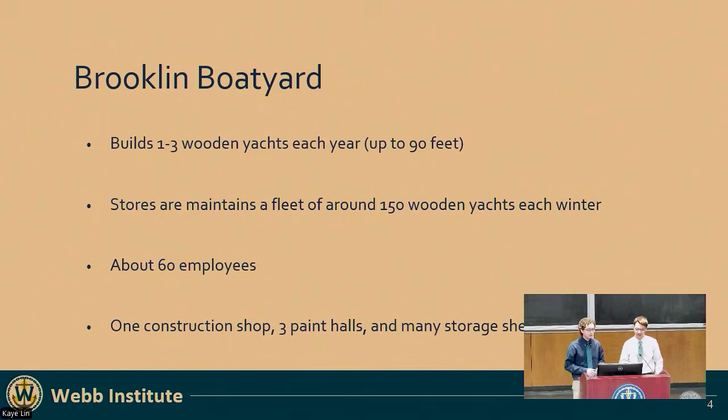Now, a little about Brooklin Boatyard. It's a pretty small wooden boatyard with about 60 employees, and they build about 1 to 3 new-build wooden yachts per year. A large part of their business is repairing and maintaining a fleet of about 150 wooden yachts owned by a variety of different people. A lot of their work is bringing those in and out of the water, storing them, and doing maintenance on them.

Like Curtis mentioned, it's a full-service boatyard. They deal mostly with pleasure craft, motor yachts, sailing yachts. The population of Brooklin triples in the summer, so it's a lot of service for vacation goers. But they do some commercial work. When we were out there, the harbor or bay that they service had one commercial scallop boat out, and when we were there, they took a lobster boat in and out.

It's a full service wood shop. They've got an incredible selection of planers and joiners and table saws, band saws, anything and everything you could want. Full industrial equipment. It was really quite amazing.

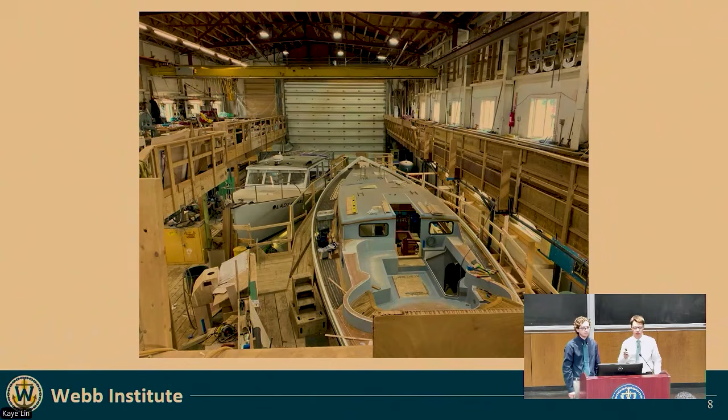It was repurposed, I think in the 60s, when Joel White started the yard. He was actually E.B. White's son, the guy who wrote Charlotte's Web, which is kind of fun. But yeah, it's a full-size shop. In this picture you can see the lobster boat we were working on, from the 40s, a bunch of restoration work being done, and a new 56-foot cruising boat that I believe they launched this past July.

So a few jobs that we did, we kind of got to see the entire life cycle of teak decking. We installed teak deck on one vessel, sanded it down on another, and repaired the caulking on a third one.

We also, to get Lady Claire, the lobster boat, into the main hall, we removed a portion of the 3rd level of the shop, which was interesting. And when we weren't doing other jobs, we did little tasks like sweeping and bringing out trash and stuff.

Another thing we spent a fair amount of time working on was composites. I didn't realize this going into it, but a lot of, especially the new build boats that Brooklin does, they do a lot of work with composites, either wood epoxy composite or carbon or glass composites with foam core, carbon core, honeycomb core, kind of runs the gamut.

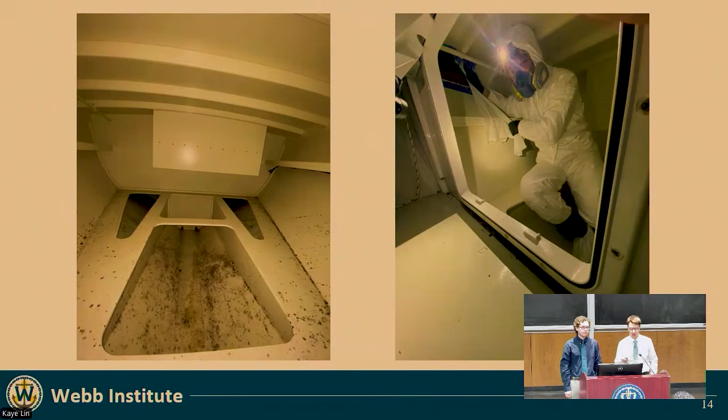A lot of the other blocks went back under the cockpit lockers, so we spent a lot of time in tight spaces, trying to measure and craning your neck and that sort of thing. We had to slide in and out of these lockers a couple times and get the blocks marked off and cut into different shapes around the supports that were already there.

The hull wasn't thick enough for the stanchions to go directly in, which is why we had to add these blocks. After we got the blocks in place, we found the same locations on the deck, were given a drill, and drilled through. Thankfully, all of them did line up onto the blocks, so everything was good and well supported. Then we glued all those stanchions in place, and it was good to go.

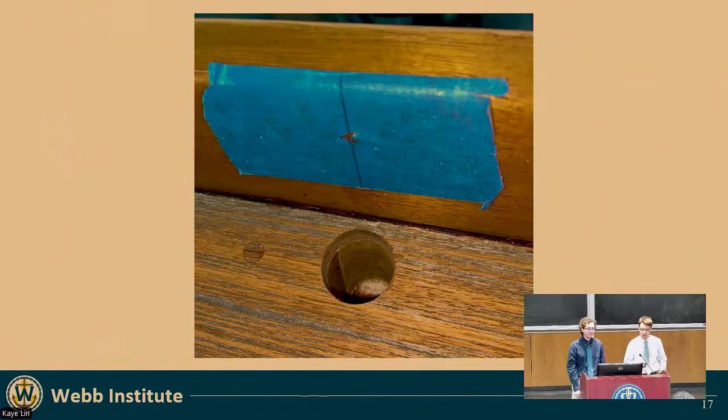We were also right near Acadia National Park, which was a great place. We did a couple weekends of hikes in the winter snow, which was really fun.

So the other boat that we spent a lot of time working on was a lobster boat from the 40s by the name of Lady Claire. Long story short, she had been out in the harbor on and off for years and years.

The owners had taken her somewhere to get work done, took her to Hinckley. The people at Hinckley didn't know what they were doing. They screwed her up even more.

So she got brought to Brooklin to get everything fixed and done properly. The surveyor said she needed a new keel, so we knocked out the old keel, got $20,000 worth of green white oak timbers, and put a new keel together. That was an exciting project.

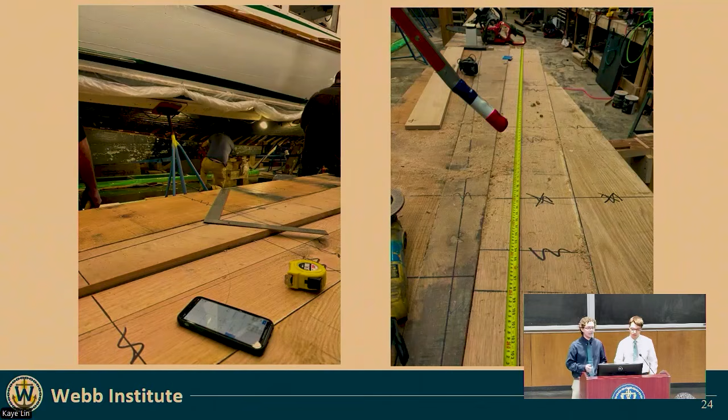One of the later projects we were given was to figure out the bolt placement to hold all of these 4 massive timbers together. Near the shaft line, we had to calculate the angle so as not to hit the shaft line, because that would make the propeller not able to go, and also not have the bolt miss the last timber. So we very carefully figured out the angle and built a jig to drill through that, and everything worked great.

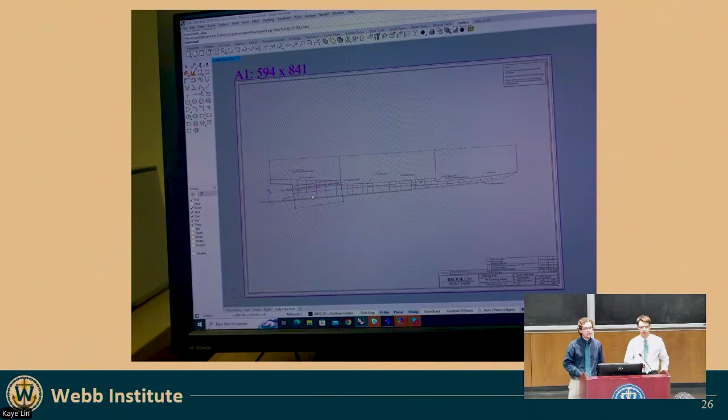After we got all the keel together, we were given the task of creating a drawing of all the different joints and bolts so that it could be given to the Coast Guard and other agencies for certification that the vessel was safe to operate.

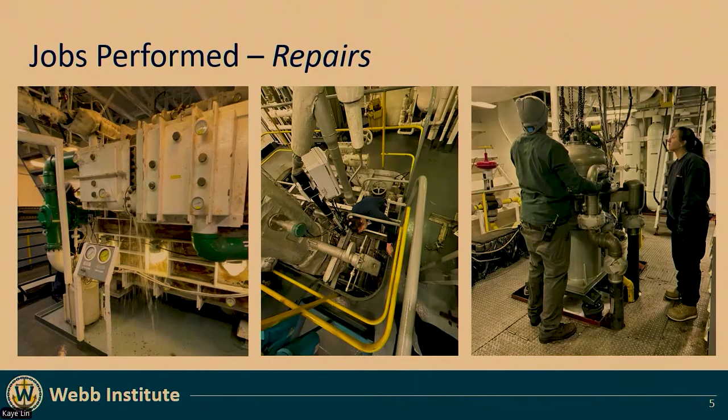In this first video, you can see the evaporator I mentioned. I don't think the water is supposed to do that. So we got very familiar with the mop as Chris and I cleaned it up. It turns out a gasket had blown, so one of our big solo tasks was creating a new gasket from the measurements we were given and installing it on our own. Successfully, the leak stopped. I don't have a video of it working, so you'll have to trust me on that one.

We also got to follow an engineer checking the boiler, making sure nothing was broken, and replacing things that maybe the shipyard didn't do a great job with, which is also where we found another leak. Luckily it was just a small oil leak. We tightened a screw, and it was much easier to fix than the evaporator.

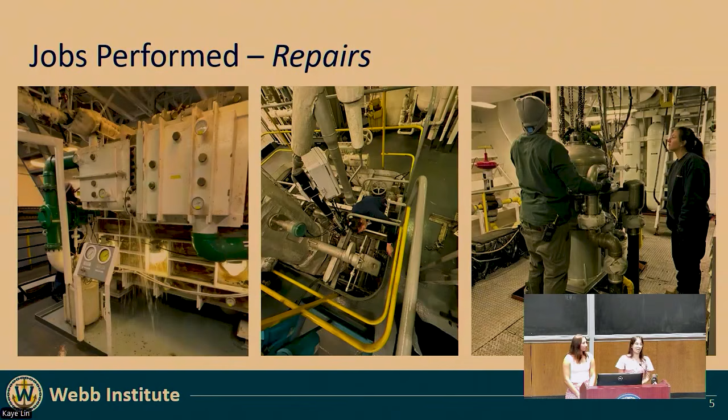The coolest repair we did was on the oil purifier in this last picture. We were sent on a wild goose chase to find various tools and repair manuals and anything we might have needed, and it was a great experience to see how the engineers complete their tasks, from sourcing materials to looking at what actually needs to be fixed in the manuals. It proved to be very helpful throughout our sea term project.

We also performed, I'm sure all of you are familiar with this in one way or another, grunt work, like the sweeping and mopping up from the evaporator. In this first picture, you can see Carissa underneath the gas turbine. We were charged with cleaning out the module, cleaning all the soot out. I don't think we saw the sun that day. We were in the engine room for hours cleaning that out.

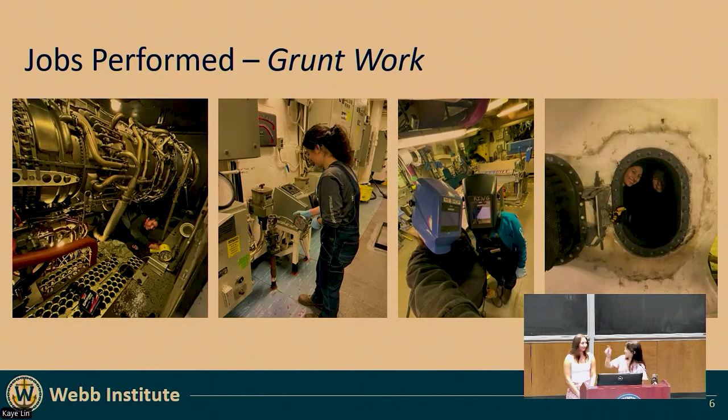We also did tank soundings, which are just running around the ship like a maze, measuring things in different tanks. We did get lost a few times, but it worked out okay. We turned a lot of valves, did fire watch, which is just making sure that when someone is welding, nothing catches on fire. Nothing did, but it's always fun to observe. We also got into plenty of small spaces, which in this last picture was a little small - we went into the exhaust, which was pretty cool. We looked up and it was the sky. We also climbed up a few too many ladders with a few too many tools in our hands.

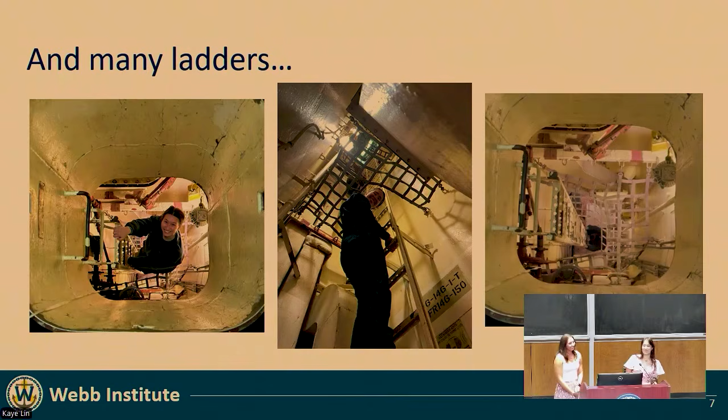Our work environment was really amazing. We worked under our chief engineer and first engineer, who was actually the first acting female chief that MSC has ever had, so that was really inspiring to work under her, and we learned a lot from both of them. The crew as a whole, especially the engineering department, were extremely knowledgeable and friendly. They just wanted our ship experience to be the best learning experience that we could get, and especially since we didn't go out to sea, they felt really bad and tried to give us as much as they could.

So they started the gas turbines for us. That was that video that she showed you. And we started up the SSDG, the ship service diesel generators, and we got to see a lot go on, and they really did try to make it the best experience, and it was really helpful for our sea term project.

And every single person, because we always asked, like, what do you like most about this ship, or do you like your job? It was a big one. And one of the, everyone said they loved it. It was the best ship they've ever worked on. And our favorite quote was, 'This ship is a beast,' and we totally saw that firsthand.

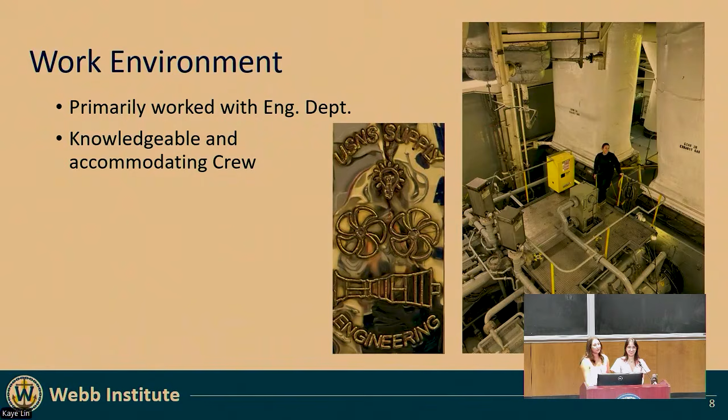It would have been cool to see an underway replenishment, though. We saw videos, so we'll use our imagination.

So even though we were welded at the pier, we did take advantage of that by having some special experiences, such as going on some ship tours for ships that were also unfortunately stuck at the pier. One of these was the USS Gravely, which was a destroyer on the same pier as us. We got a very detailed tour of the auxiliary spaces and main engine room, and one of the coolest things we saw

was the 5-inch gun on the front of the ship. We actually went inside and climbed up to the top, and someone was describing how it worked. I was only allowed to take one picture, which is this right up in the corner. We couldn't take out our phones at any other point, so you'll just have to trust me on everything I'm telling you right now.

We also got a tour of the Gerald R. Ford aircraft carrier, which is very different, going from an extremely small destroyer to a bigger than you can imagine aircraft carrier. So we only saw a few auxiliary spaces and some of the workshops. Of course, there's more restrictions just because of the nature of the ship.

But there was a little museum dedicated to the namesake, and at the end of our tour, you can see this lovely picture of Carissa and I out on the flight deck. It had snowed that week, so we got to see a lovely view of all the ships and the port with all the snow. It was beautiful.

It was just a really good experience of seeing a variety of ships. Like normally when you're on ship and at sea term, you're stuck on the ocean and you kind of only get very familiar with your ship. So it was a very valuable experience to be able to compare what we see every day working to other ships and what their systems might operate as.

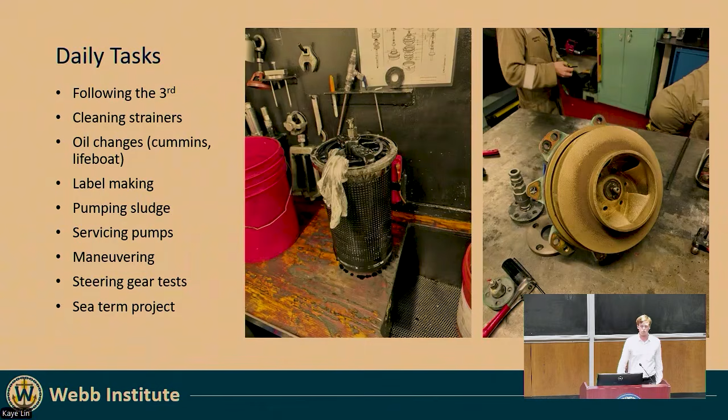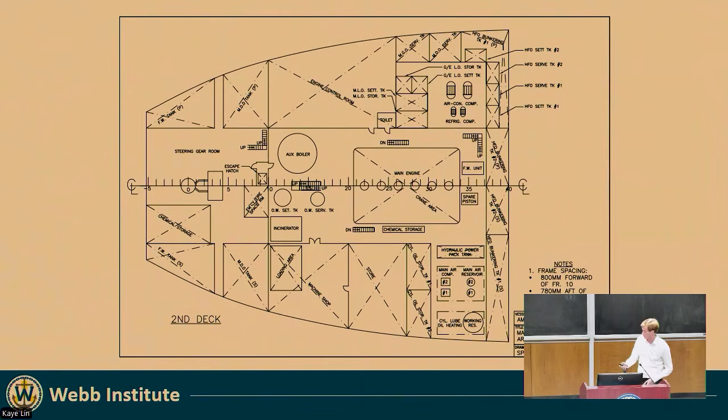When I wasn't helping the third or any of the other engineers, I was working on my sea term project. So this is one of various drawings I made of my sea term project, and it's a machinery arrangement for the second deck. So every morning, I would walk down these stairs and walk into the engine control room here, and we'd figure out what we were going to do for the day.

The crew on American Freedom were unionized. We worked 8 a.m. to 5 p.m. with 2 unionized coffee breaks that didn't involve coffee. We had an hour and a half of lunch. The food was edible, and I wouldn't say much more.

3-day sails, we never encountered super rough weather. On the right is the worst we encountered, but a lot of the time we were in a ballasted condition, so we'd be rolling pretty quickly and it could get uncomfortable. And that was my stateroom. Not glamorous, but it gets the job done.

So now I'm going to talk about some of my favorite highlights from the trip. The first being breaking in the rescue boat. No, we didn't have to rescue anyone.

When I arrived, we swapped the outboard on the rescue boat because the old manufacturer was out of business and we need to be able to service it so that it's always functional. Once we installed it, we needed to break in the engine, and I was voluntold to be the ballast on the rescue boat. So I got this really sick photo.

The unfortunate thing is the davits for rescue boats are notoriously unreliable, so when we were going back up onto the ship, I was lifted 5 feet in the air, and then we waited for 20 minutes, and then we got lifted the next 30 feet.

Also, while I was on board, an MAN superintendent came to check out the engine. So we got to open up the crankcase, see what was inside, and we checked the alignment between what the computer system thought the engine was at and where it was actually aligned in terms of if it was at the top dead center. And this was an awesome experience.

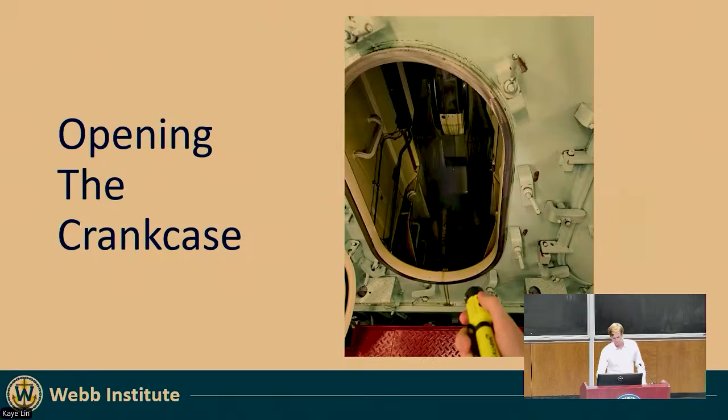I got to go off ship while I was on board, which is pretty irregular these days because our port calls are very short. We can pump a lot of fuel in under 10 hours. But there is a ship inspection report program audit where they check your safety so that ship owners and operators can understand the quality of their fleet. And I was told by the chief engineer, I don't want to see your face, please leave.

So learnings, number one, ships are cool.

Life at sea is definitely tough. While I was on board, I had Starlink internet and I could call my family, but you're not getting Amazon one-day shipping. You're out there on your own. I was only on for 47 days, but a lot of guys were out there for 90 days, and on international ships, the standard is 120 days. So it can be a difficult experience.

As a designer at Webb, you've got to think about designing for easy maintenance, because often what's easiest for me to design is going to screw the guy that has to fix it. And I think you should have some compassion for them. For instance, we had a gap to the lowest part of the engine room, so you could lift things out and service them on the main deck. It was only about this big, so if you were in heavy seas, you wouldn't be able to lift a pump and service it because you'd be rolling too much. So things like that you need to think about as a designer.

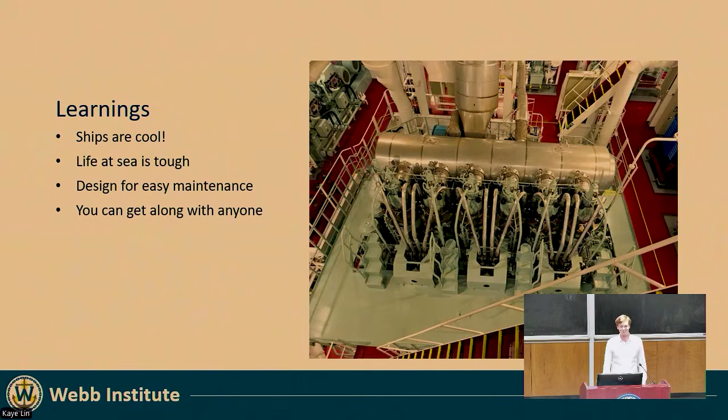And finally, I think you can really get along with anyone if you're locked in a box for 3 months. So with that, I'd like to thank Webb and Crowley for this experience, and ask if you have any questions.

Is it common for Webbies to go in pairs? It seems like the other two went in pairs, so you went alone, but was there another student? There was another cadet that went to Mass Maritime. I didn't know if there would be another one — normally people like to go in pairs. I knew that I really wanted to go out to sea, so when this opportunity came up, I guessed that I'd have internet and be able to call my family.

Did you think about taking the Jack and Spencer Coffee Club? People were more fond of Monster drinks than coffee aboard.

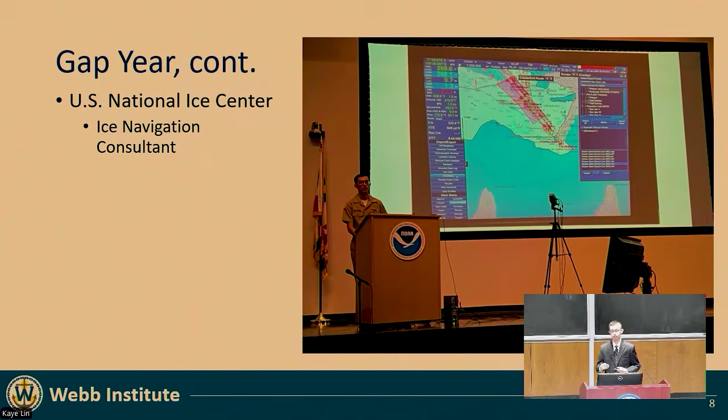Working this far ahead is a theme that comes back. When working with US government internships, especially those that require security clearances, it's important to be about 12 months ahead. So I was usually preparing one or two internships ahead of the one I was in or going into.

So I went back to Webb for sophomore year and worked as a junior naval architect at the Coast Guard Yard. And even here, I kept up with the continuity of icebreaker operations. I worked on structural modifications for the medium icebreaker Healy and structural analysis for the special purpose craft Ice Rescue Transport.

Keeping the Coast Guard and polar operations work going even further, I went back to the Coast Guard's component of the North American Ice Service, the International Ice Patrol. Here I did similar work that I had done with the Navy. I worked as an ice navigation consultant and redid some of their navigation products.

When I came back for the fall of my junior year, I took another week of skips - that's becoming a trend - and I went to the International Ice Charting Working Group Conference at Naval Postgraduate School in Monterey. This was a good development because the first time I took the week of skips, I was just going to a conference as an attendee.

As a junior, I was now taking a week of skips to go to a conference as a presenter. So this was good to demonstrate to the Webb faculty, my mentors, and my external sponsors that I was having development and growth in my undergraduate experience.

However, I was getting pretty focused on the US Coast Guard. And the index card very clearly says NUPOC program, which is Navy. But my reorientation to the Navy actually starts in sophomore year.

In the fall of my sophomore year, Portsmouth Naval Shipyard came to this auditorium to recruit for winter work. I submitted my application and didn't hear back at all. At the last week of my sophomore winter work, so February of my sophomore winter work, they reached back and said, here's a job offer. And so I took it.